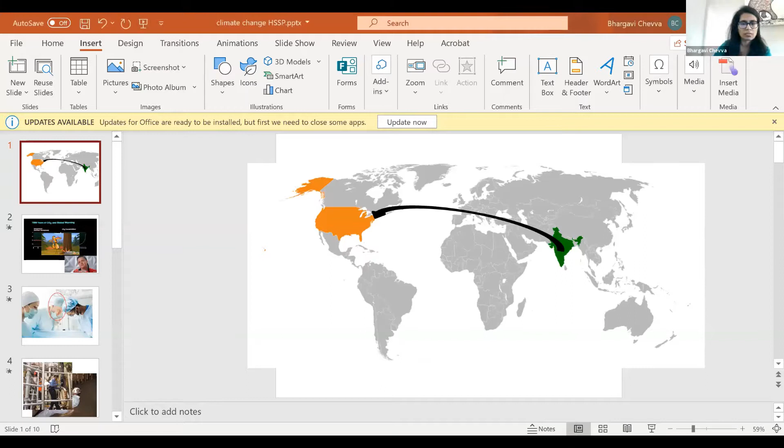As Cody said, I'm just going to talk a little bit about myself and my career and how it fits into climate change, and then I'm happy to answer questions later on.

So a little bit about myself. I was born in India and lived there till I was 10, and then I moved to the US afterwards and have been here since then. Growing up, I always thought of myself as just a typical tree hugger - I loved the environment but hadn't really thought about climate change.

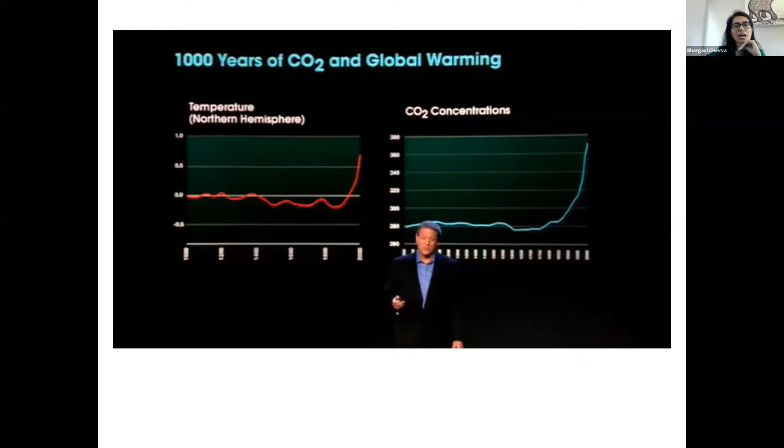I hadn't really thought about climate change until I was 18 when I saw Al Gore's Inconvenient Truth. Seeing the graphs in the movie, seeing how CO2 was going up and temperatures were going up, was completely terrifying. It was the first time I truly thought about climate change as a problem, but I still didn't think of it as something I should pursue in my career.

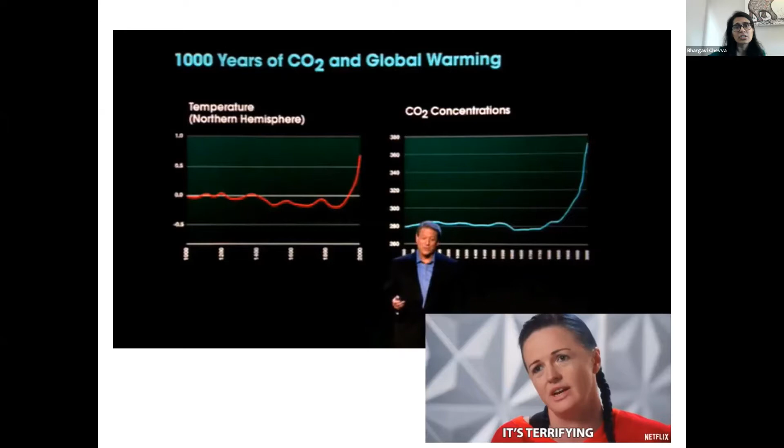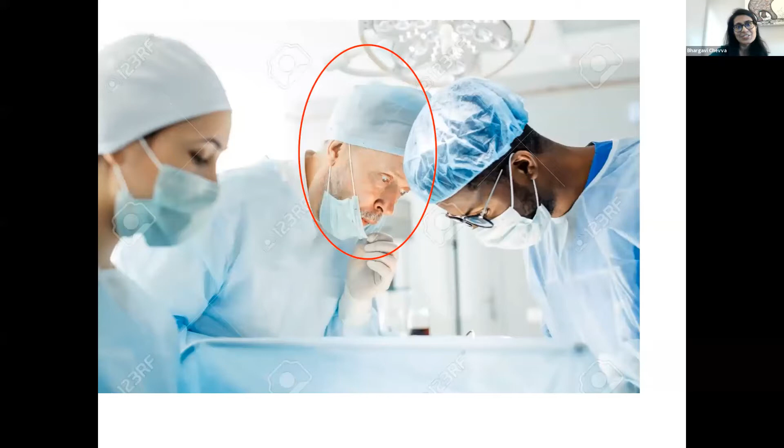Because when I was in high school and even in early college, I always thought I would be a doctor. Thankfully that didn't happen, because I would have been the one looking at human bodies and blood and all of that stuff. So I realized in early college that probably wasn't going to be the career for me.

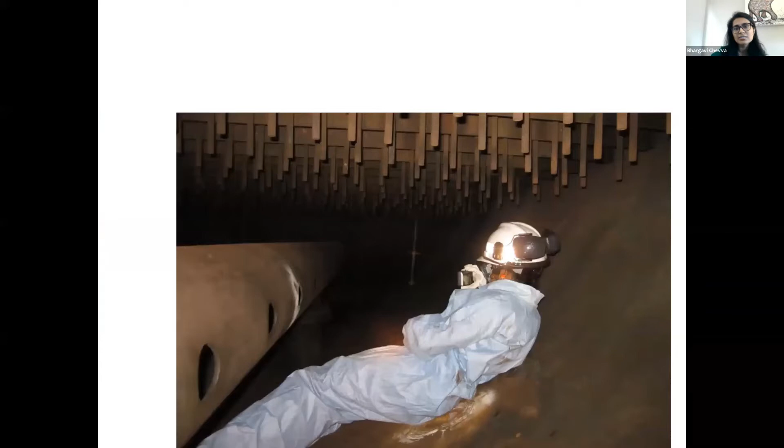After majoring in chemical engineering at MIT, I went to work for the energy industry, where I got to do a lot of cool hands-on things, did a lot of inspections in drums and reactors like this, and learned how to be a good engineer. But thinking back to what I truly wanted to do, I've always wanted to make a difference.

So I truly knew that in the end, climate change was a problem that I wanted to focus on and solve. After spending a couple of years as an engineer in the energy industry, I started working on a company with a friend of mine while in business school, called Pico Energy.

What we were trying to do was focus on working in small villages in India initially, with the plan to expand beyond that. We looked at micro businesses - small mom and pop shops in villages that weren't connected to reliable electricity with the grid.

So what we wanted to do is provide them with electricity, thereby increasing their revenue overall, because they'd be open longer and able to operate longer, if it was a tailor shop for example. The idea was that by providing them with more revenue, they would be able to pay us back for the fee we would have incurred to provide them with the electricity in the first place, using a solar system.

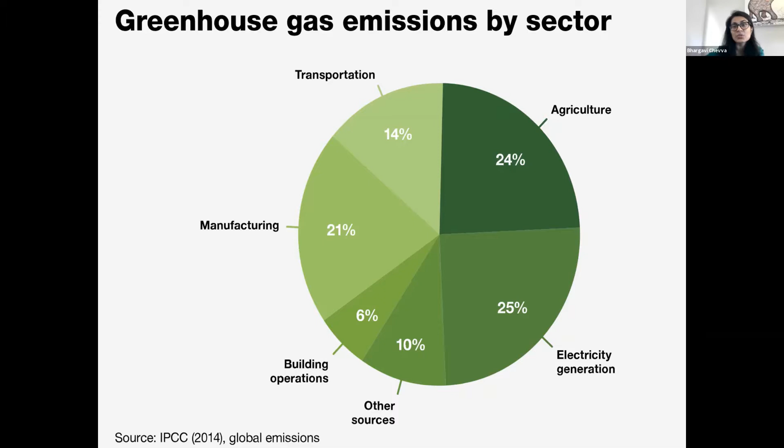If you look at this chart, agriculture contributes almost the same emissions as electricity, which when I first learned that, it kind of blew my mind. So I just want to put that out there today—think about it if you want to help reduce emissions in the world and fight climate change. I wanted to highlight a bunch of other things you can do, whether in agriculture, transportation, buildings, or of course electricity. If that's your passion, definitely go for that. But if that's not what gets you excited, here are a couple of other ideas that might be more interesting.

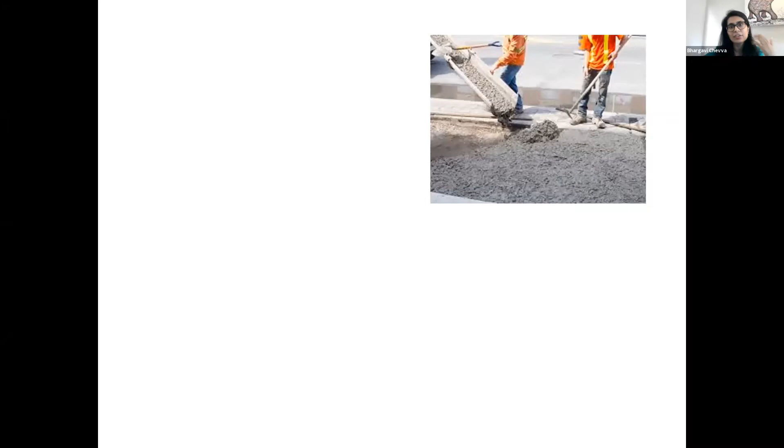For example, cement and concrete—the world's biggest man-made material by volume. We're going to be building more and more buildings in the coming years and decades as population grows. So how do we figure out how to make cement, and thereby concrete which takes cement to make, greener and create fewer emissions?

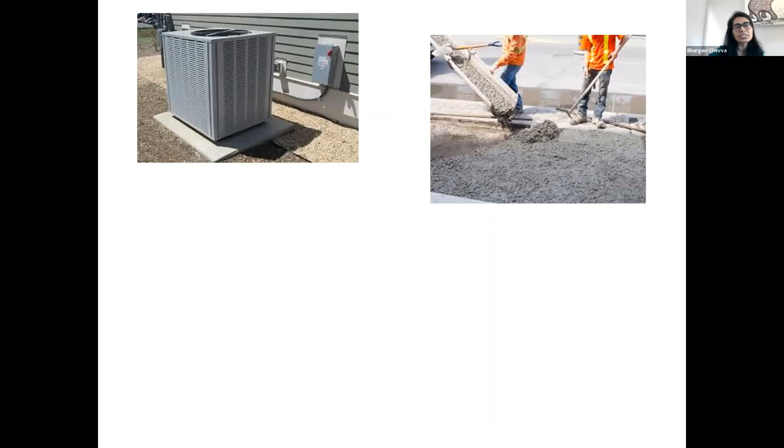Additionally, air conditioning—most of you have experienced the ridiculously high temperatures this summer, and hopefully have relief from an air conditioner. But it also takes up a ton of electric power, and as the world grows and the middle class gets more money on a global scale, they're going to want air conditioning. We need to figure out how to do that efficiently and with less emissions.

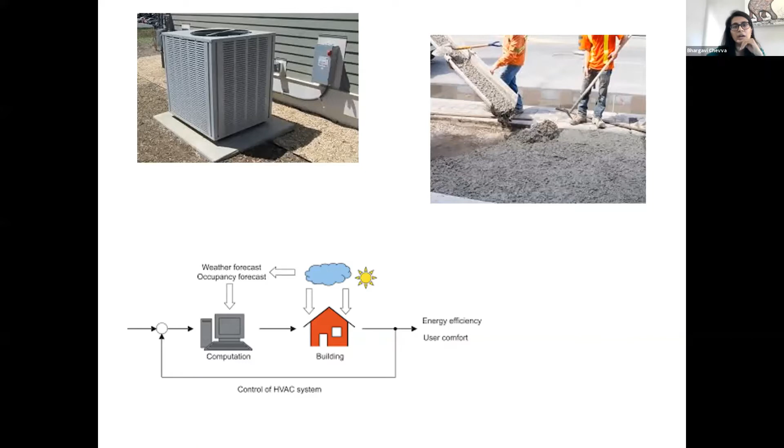Speaking of buildings, how do we figure out how to control buildings and make them smarter, so that instead of reacting to temperature changes, they can predict what's going on—like, 'today's going to be pretty cloudy, it's going to be kind of cold, so let's not kick on the air conditioner as much.' Can we use technology to help make buildings smarter?

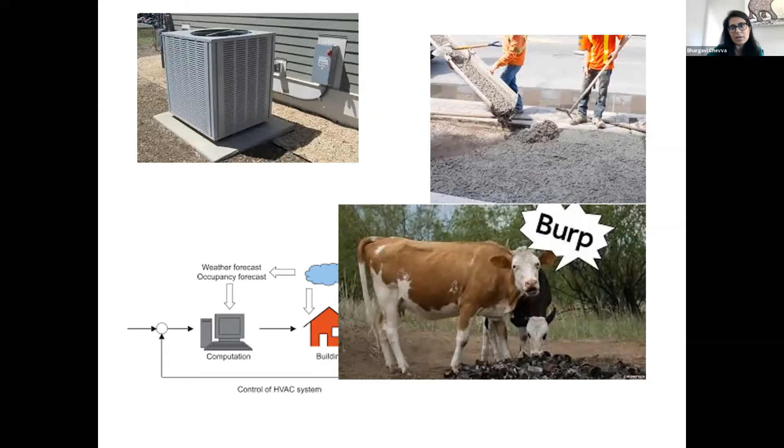And on the other hand, with agriculture, cows contribute a lot to methane emissions, mostly from burps. Can we figure out a way to reduce that but still produce the same amount of meat we need? And can we figure out alternatives to meat that still taste like meat and are as attractive as meat, but don't contribute to those emissions?

Another area that could be super interesting is just farming. Can we figure out how to make fertilizer using microbes instead of putting in a bunch of ammonia to make fertilizer? Can we figure out how to capture carbon into the soil and enable that as a way to reduce the CO2 that's in the atmosphere? Hydrogen, can we figure out how to make hydrogen from electricity instead of using natural gas for it?

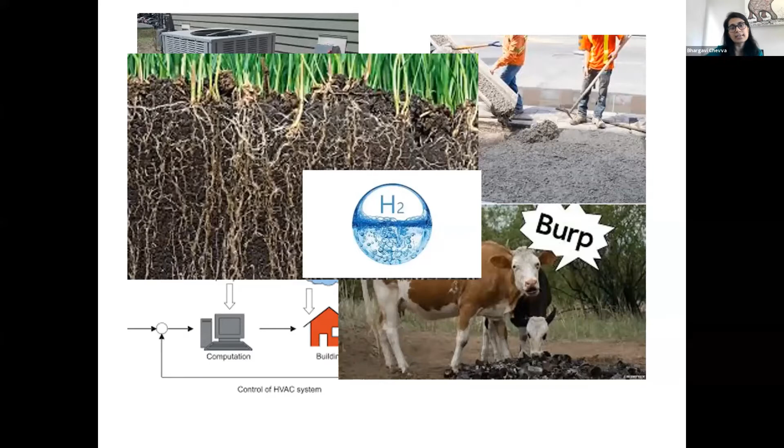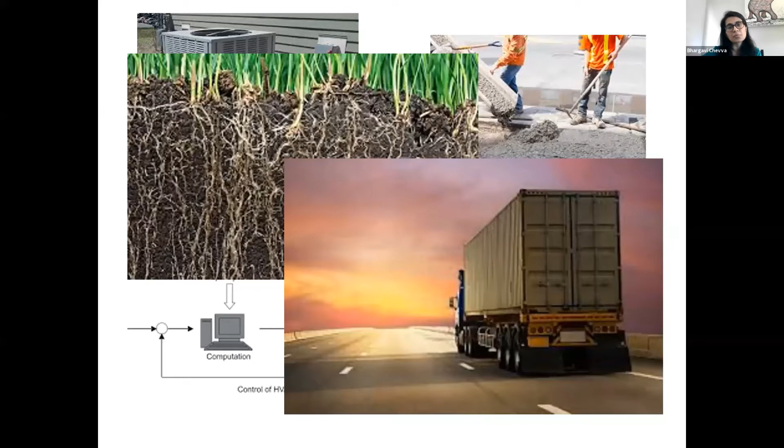And use that to power our cars and other industrial processes. Trucking, in addition to electric vehicles in general, can we figure out how to move our stuff and our people with less emissions that are produced? Plastics, even though the actual landfill of plastics doesn't produce emissions in the short run, the actual production and incineration does produce emissions. Can we figure out a way to do that without them piling up?

And then lastly, but definitely not least, everything I've said so far was how do you reduce emissions from products that are already being made. But CO2 capture focuses on how do we take CO2 out of the air that is already out there. And we need all these solutions and more to help fight climate change. So that's just a couple of examples.

Another good resource is Drawdown. There's a book out there, but you can also go to the website and they cover a number of solutions that go beyond just the obvious ones. So if you're thinking to yourself, I don't know if electricity generation is where I want to spend the rest of my life doing, you can find a ton of other ideas and start exploring them.

And lastly, we need all hands on deck. This is a huge problem to solve in the coming years and decades, and not necessarily impossible though. We need your creativity, skills, and everything else to contribute in order to solve this problem. With that, I look forward to answering any questions later.

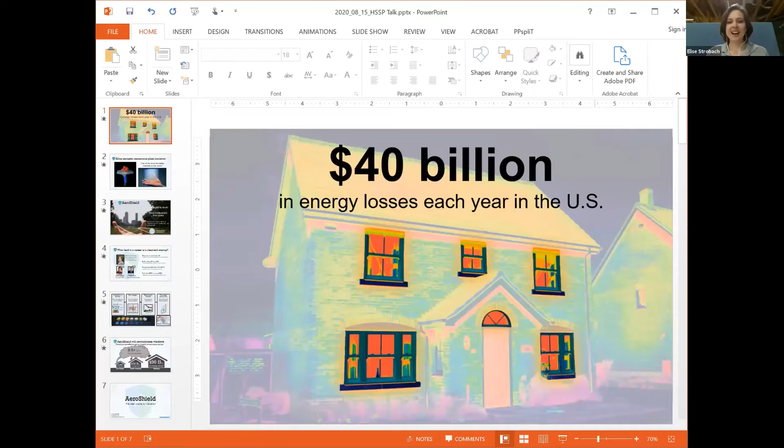Fantastic. Well, thanks, Cody. I'll just pull up some slides here. I'll just get started with an introduction. So my name is Elise Strobach, and I'm going to speak a little bit about, start off with posing the problem that I think about in my startup, AeroShield Materials.

And it's buildings. So thanks to Bhargavi for really previewing that this is one of the big challenges that we have. And if we take a look at this thermal picture, what you see is this thermal map, and where you see those hot spots, those losses coming through, whether you're talking about a hot building or a cold building, are those windows. And it turns out that buildings, as an overall energy use category, are responsible for 40% of our greenhouse gas emissions. And of those emissions, windows, these thermal hotspots, are a huge problem.

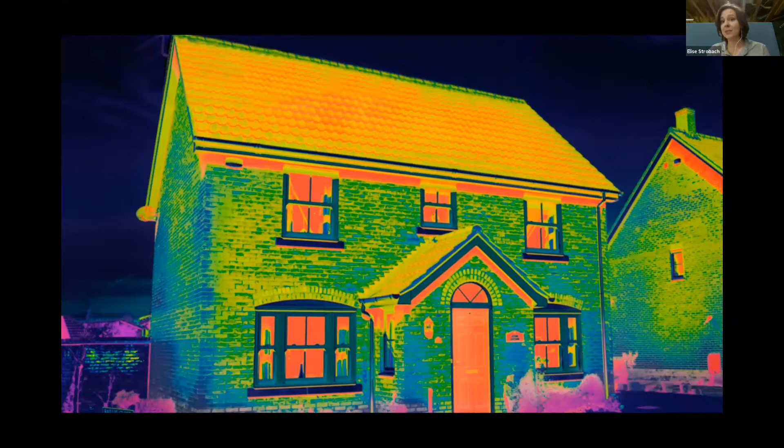In fact, every year in the United States, $40 billion in energy goes right out that window. And for a long time, people have looked at how to solve this. But if we think about this from a fundamental standpoint, from a technology perspective, that's not an easy challenge to solve. Our windows have to be really clear. They have to be insulating. We have to be able to afford them. We have to be able to install them and have them survive in our buildings.

And so one of the ways that people have done this in the past is just using glass and multiple panes of glass. But if we think about ways that we can actually start to really solve this problem, one of the materials that's come to mind for researchers for a really long time is something called silica aerogel. And this is a nanoporous form of glass that's made up of tiny nanoparticles that are all interconnected to create this really porous network of pores that are so tiny, they're on the order of nanometers. And that allows this material to be one of the most insulating materials in the world.

But when we talked about what we need for windows, they have to be transparent. And these materials just haven't been, before. And so it was actually my work during my PhD at MIT in mechanical engineering where I really started to dive into this material and say, well, is there a way that we can make this useful for windows? And really start to get at that problem of having a new material set that helps us make buildings better, both from a person living at home sitting next to my window on a cold day, but also from an energy perspective.

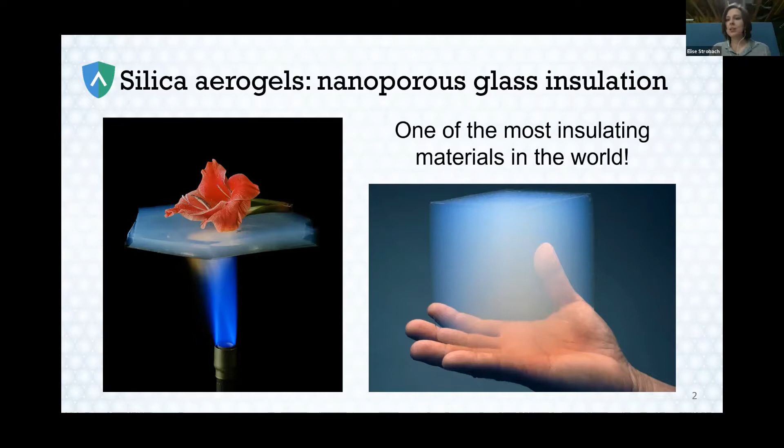The breakthrough we really had in the lab at MIT was finding a way to make this super insulating material transparent. You can see a picture of it here with this really clear structure. But all this sheet of material is glass that's filled up with tiny little nanopores. From an engineering perspective, there was a lot of time spent understanding that structure and how light, heat, and radiation travel through this network, and how, as we make this network, we can make it differently to make those end properties even better.

I staged this first because on my journey, this was a really pivotal turning point. I'd always been interested in the clean tech space, because I came from a really rural town in Wisconsin where we saw and interacted with nature every day. We had a garden, we really appreciated those things. So the other part was really appreciating what I wanted to do with my life.

I wanted to have an impact. I wanted to create something, a way to make people's lives better that could last beyond generations. That's really what led me into engineering in particular, because at the time, I knew that I liked the environment and that kind of impact, but I didn't really know how to have that impact yet, other than I really like doing a lot of different things and wanted to stay technical. I thought those were really interesting opportunities.

So I chose, after high school, after talking to a lot of people in the industry and trying to understand what kind of career trajectories there were, to go into mechanical engineering at a school in Wisconsin because I really just wanted to learn how to solve problems. I didn't know what the key problem I wanted to solve yet was, so I said, let me go out and learn how to learn and how to tackle tough problems.

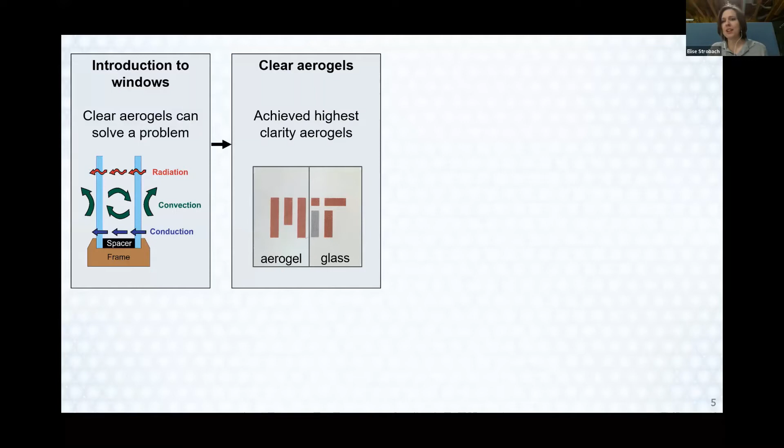So that was a really interesting kind of thread that we put in parallel to all this fundamental understanding that we were doing, looking at material properties. I got to handle these aerogels, they're a lot like glass styrofoam, and just really cool stuff. And we got to try new things and brainstorm ideas about them. And then we got to get into the details.

When we started to make progress, then it became about, we're making this material better. Now, how can we make that material even better for impact? How do we make that application really utilize what we're working on? So it's fed by technical data, but also by getting in the lab and working with it and just questioning things and talking to people.

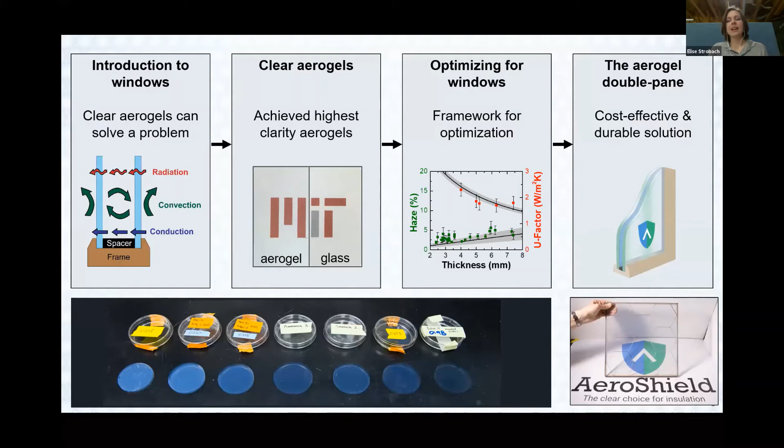Now, as I transition into this startup world, it's all about thinking of how do we translate those learnings to impact. So getting them inside of a window and actually starting to build prototypes and putting them in demonstrations, which is just so exciting. And the real crux of it, what really excites us is that now we're working on taking this idea and really having an impact in the industry, which all that time I talked about learning the window market and the kind of people that are building in this space.

Understanding how to craft our impact so that not only are we motivating people with thousands of dollars of money in their pockets because we can improve their energy efficiency and their comfort, but all the way to looking at, hey, if we could get this material adopted around the world, just for new windows that are going out, that's billions and billions of dollars in energy savings. And that's achievable within a shorter time span that we can then build on and have even more cumulative energy potential savings. And then look at other markets and do this in other ways.

So I think in a lot of ways, this has become a really exciting path that I'm really passionate about. Happy to answer any additional questions, but I'll stop there for now.

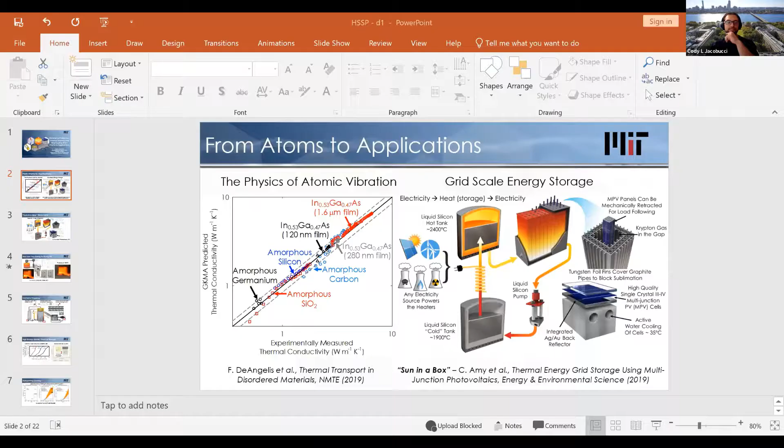Let me tell you a little bit about my research first, and then I guess I'll give a few comments, a few words on what it is that I think you all, as what I consider the next generation, can contribute in particular.

So my area of research really involves two things. Really from elementary school, I always had a passion for working on, at that time it was just called global warming. I became passionate about it as soon as I learned what it was, and I was very much concerned that this could be the end of humanity if we don't figure something out.

And so I went through school always with a passion for that, but by the time I got to grad school, I ended up going in a different direction that was not directly applicable for working on climate change, and that was studying heat transfer at the atomic level. This really was born out of some lingering questions I had from undergrad.

I had some rather deeply theoretical questions about what is temperature exactly, why does it have its own units, and what's so special about it. That ultimately led me into a field of studying heat transfer and thermodynamics at a very low dimensional scale, and really the underlying physics of heat transfer.

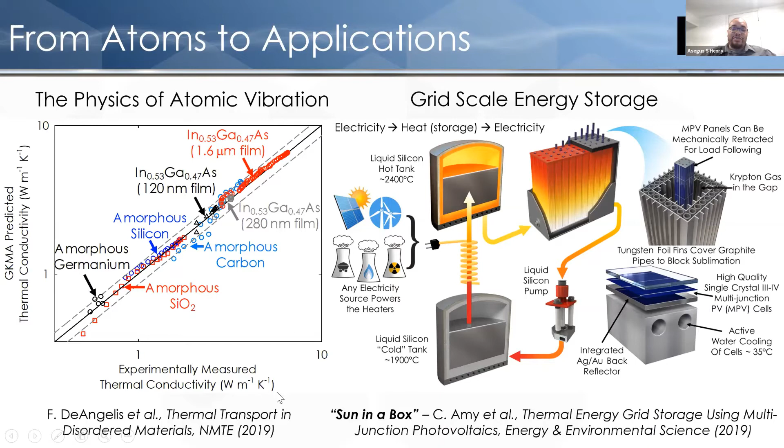So we have our incarnation of that, which has affectionately been called Sun in a Box. The way it works is one of the things we've developed over the last few years that's, I think, a significant expansion of what we can do technologically is the ability to pump liquid metal at extremely high temperatures. We can pump liquid metal well above 1,000 degrees Celsius - that's where things start to basically glow white.

In that temperature regime, it's really difficult to have even metals that are moving and have enough strength to hold their own weight and don't start to droop over time, let alone melt. Another big issue is corrosion. So our approach has been to use ceramics - a completely different class of materials, using graphite and ceramics to build thermal infrastructures that can survive and last for tens of years at extremely high temperatures.

So the idea is you take energy and instead of storing it electrochemically like you do in a battery, you store it thermally - in a very cheap medium. In this figure, I'm showing it with liquid silicon. Silicon is basically sand where you take the oxygen off, so it's very abundant on Earth. So imagine taking liquid silicon, you pump it, you heat it up by using electricity - that's excess electricity on the grid.

Could come from any source, but we're specifically interested in storing renewable energy. You heat that liquid silicon up to a higher temperature, in this case 2400 degrees C. That's about the temperature of an incandescent light bulb filament, so it's glowing white hot.

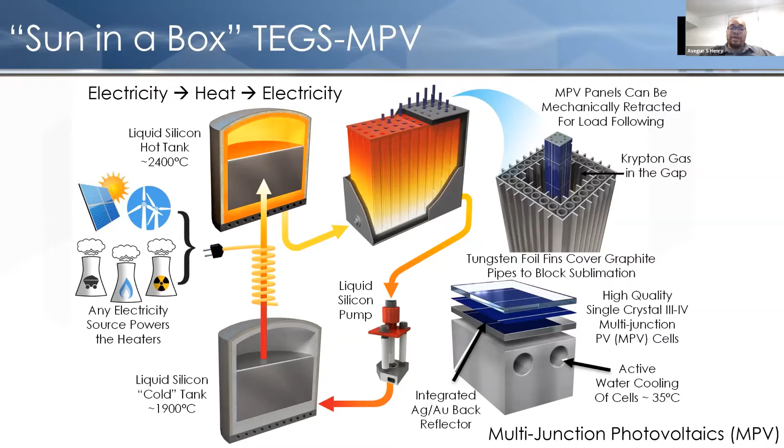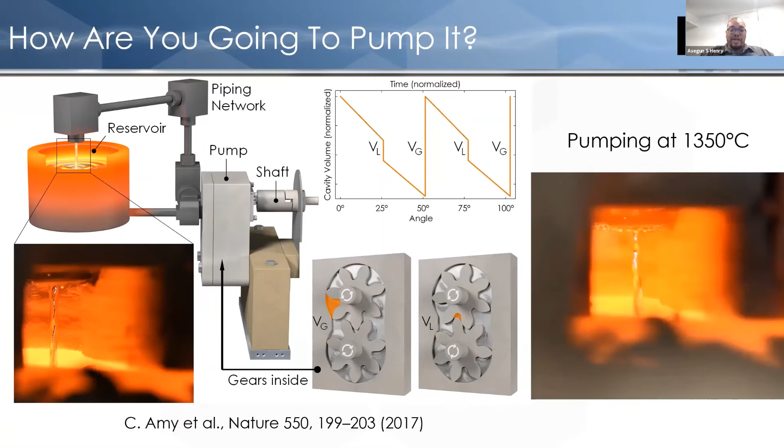Now that we have this ability to pump liquid metal, the second technology we're just getting started on is methane cracking. In short, the way hydrogen is made today - as someone mentioned for agriculture, you need ammonia, and to get ammonia you need hydrogen. The way you get hydrogen is you take methane and oxidize it with water: you react the oxygen and water with the methane, making CO2, and the hydrogen gets let go as hydrogen gas. The problem with that approach is you make a bunch of CO2. Instead, we'd like a different approach where you don't make any CO2 - you take methane and just heat it up so hot that it falls apart. The molecule becomes unstable, and you get hydrogen gas and solid carbon.

The idea is, the simplest thing you could do is put methane in a tube, keep oxygen away from the system - maybe put it inside a chamber so there's no oxygen around - and heat it up. It's not going to combust, it'll decompose, and you'll get solid carbon and hydrogen. The problem is the solid carbon deposits on the walls of that tube. Say you're heating the tube from outside - as the solid carbon deposits on the walls, it very quickly chokes the reactor, blocking the entire cross section of the tube, and you won't be able to run it anymore.

And then you'll have to cool it down, clean it out, start again. That whole sequence would be very expensive and very inefficient to do it that way.

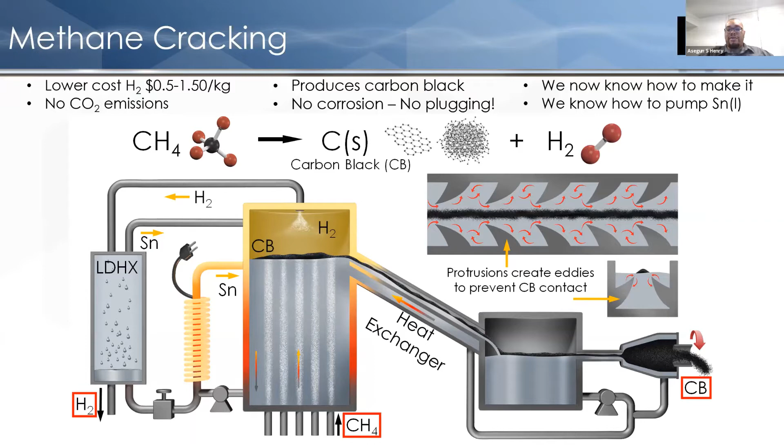In the interest of time, I'll just very briefly mention, we had a paper come out earlier this week. There are 5 grand challenges that we laid out that have to do with thermal energy. One has to do with energy storage.

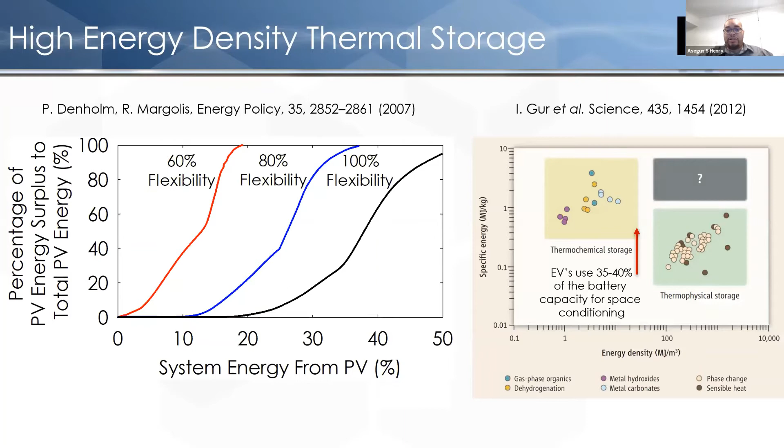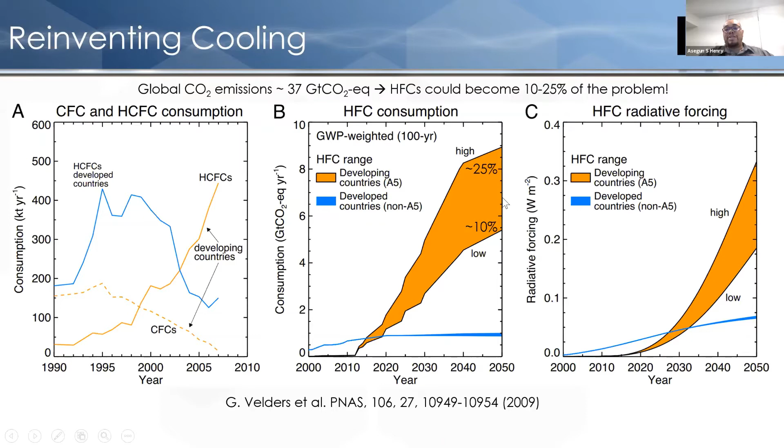As I mentioned, we're working on an energy storage technology. Another one is cooling. With all the air conditioning units coming online, particularly in developing countries, it's expected that the global warming potential of refrigerants as they leak out of these AC units—it's a small amount of leakage, but the global warming potential is huge—will become a significant fraction of global warming by 2050. Another one is industry, as was also mentioned earlier.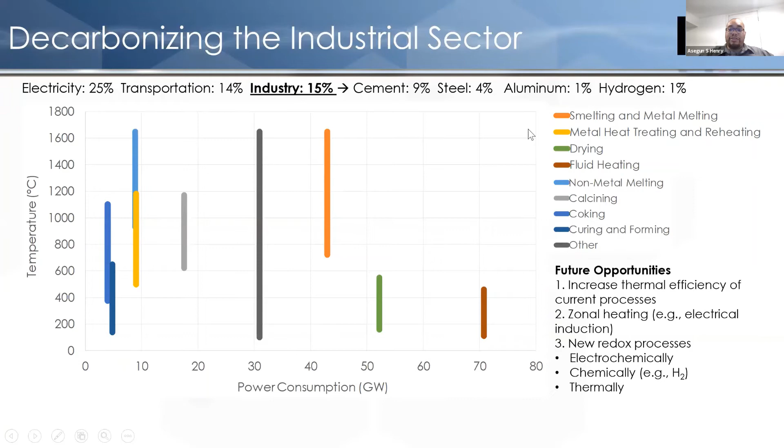Particularly cement, steel, aluminum, and hydrogen are some of the big industries that are responsible for CO2 emissions.

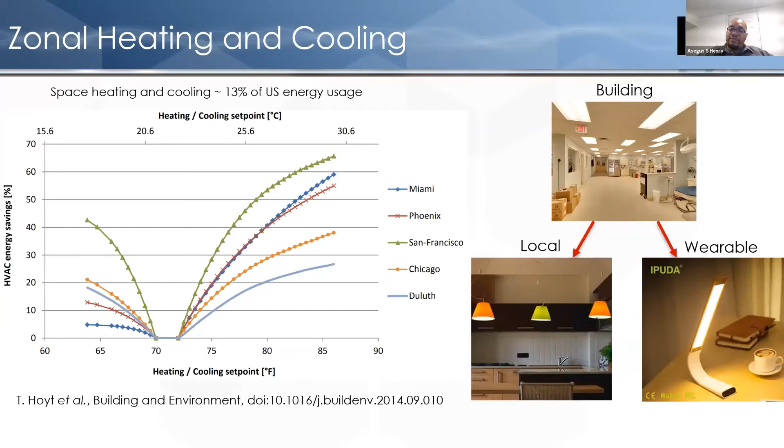And then there's this issue of rethinking cooling in terms of zonal heating and cooling. If you think about lighting, you only turn on lights where you need it. But instead, when it comes to cooling, we cool the entire room, the entire volume. We could cut the amount of energy required if we could figure out a way to actually just deliver the cooling where the people are, and cool the person rather than all the extra air around them. So this is another topic.

We can move electricity through power lines—we're able to move lots of electricity through very little hardware. If we could figure out a way to do something similar for heat, we could utilize and repurpose this waste heat for actual heating loads. So this is another potential area where we could see some big gains.

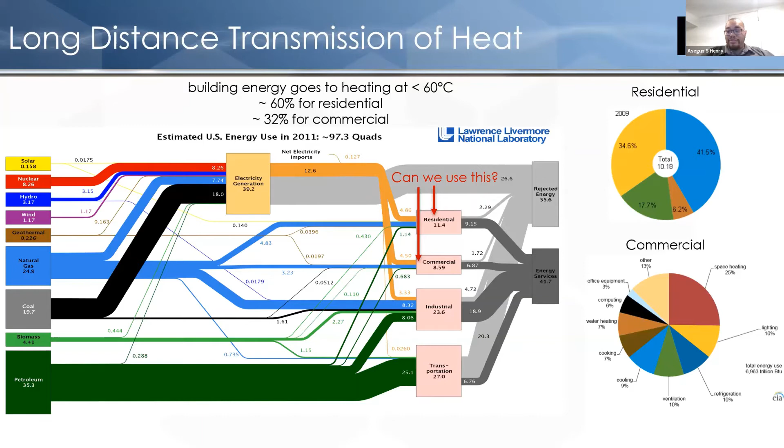So I'll stop there, and any questions you have, I'd be happy to answer when we get to that part. Thank you very much.